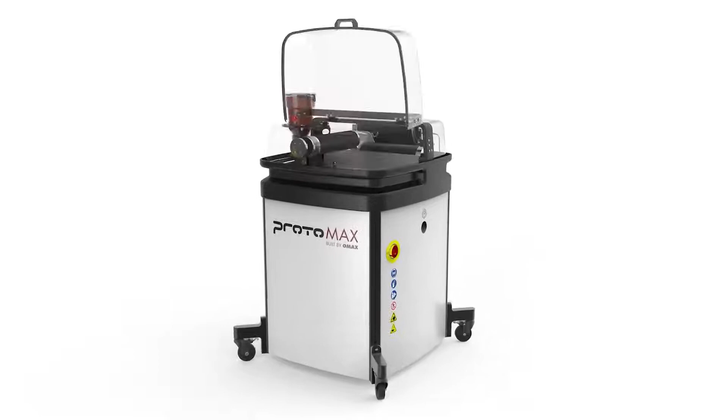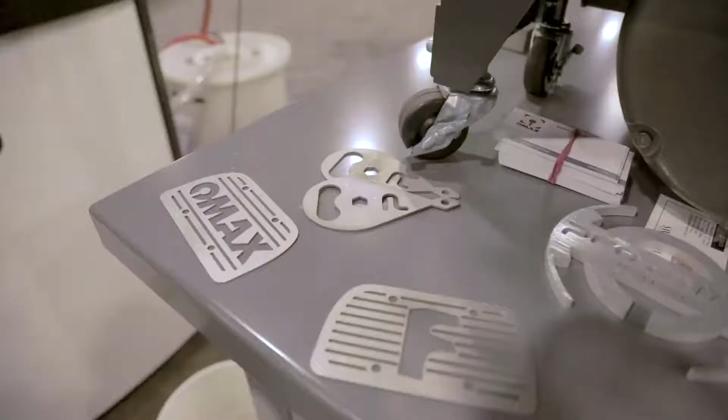Meet the ProtoMAX by OMAX. The ProtoMAX is the first light industrial water jet on the market. It cuts metal, glass, plastic, and wood. The ProtoMAX cuts almost any material under 1 inch thick with a 12-inch by 12-inch cutting area.

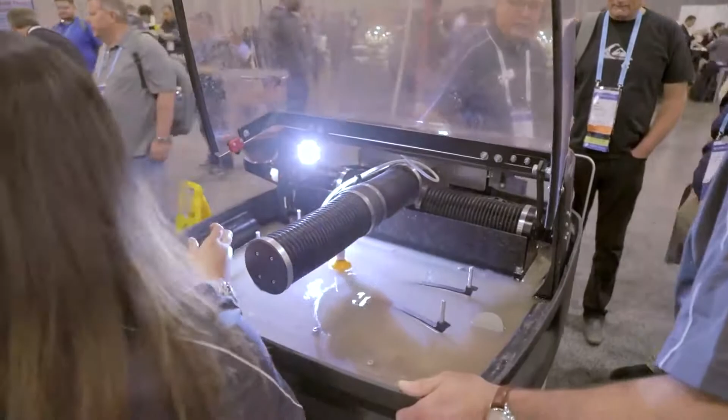He said, yeah, if you want to bring it in, go ahead. So we brought it in and we started cutting things, and I had no idea how many small parts I was going to end up cutting. We've gone through buckets and boxes of abrasives with this thing, just cutting out all this stuff.

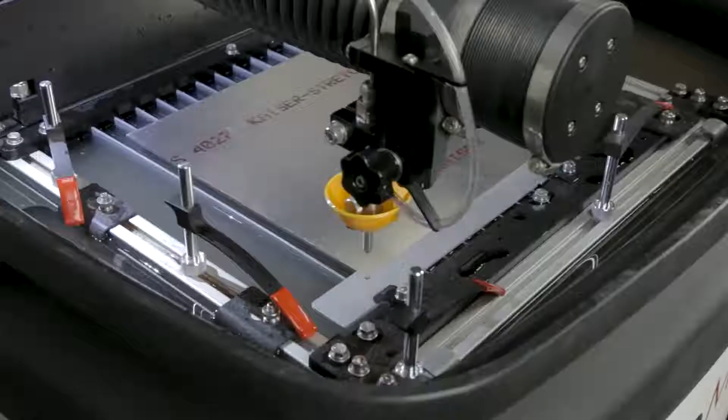Using the new ProtoMAX abrasive Waterjet as a teaching tool for the next generation of manufacturers, OMAX inspires design, machinery, and innovation as students and teachers explore the advancements of abrasive Waterjet technology.

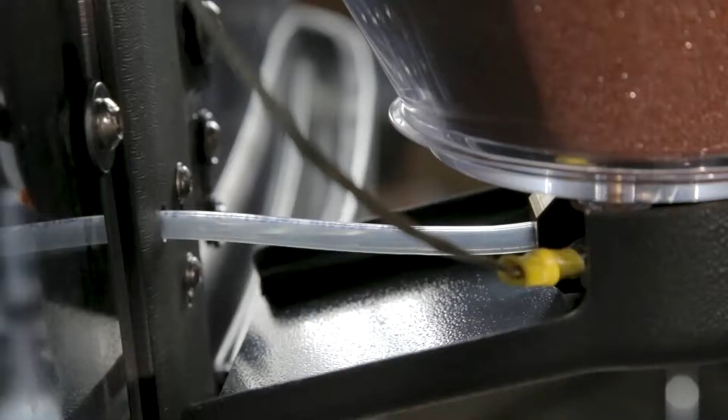The ProtoMAX IntelliMAX software is developed alongside the abrasive Waterjet hardware. Using empirical data on how the jet stream behaves with the specific configuration of nozzle, abrasive, material cut, and more, the developers are able to better adjust for what is actually happening at every single point along the cutting toolpath.

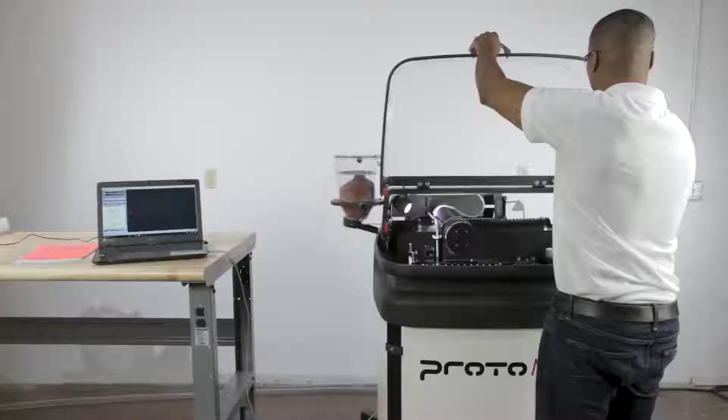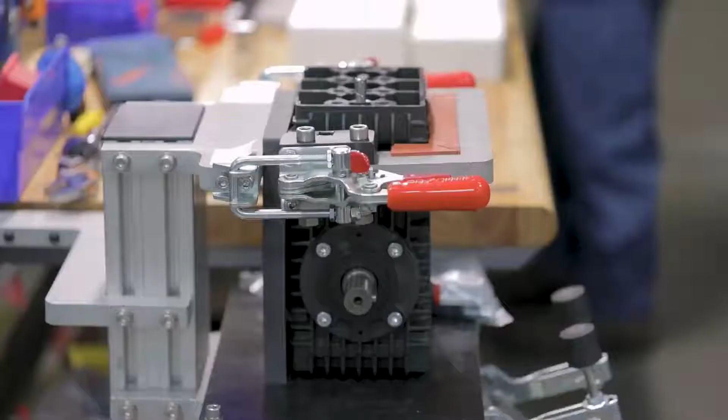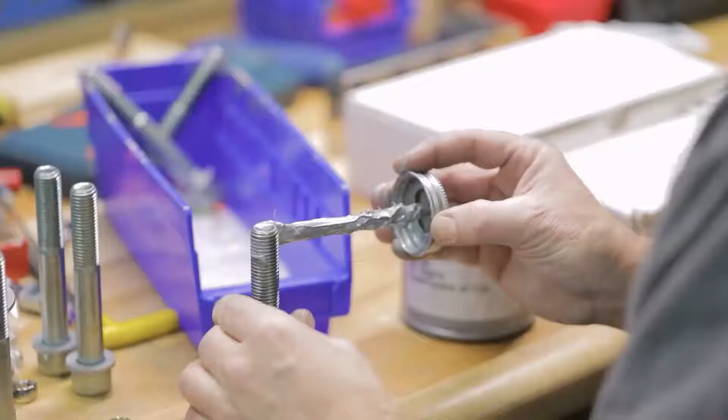With advanced OMAX engineering in a space-friendly package, the ProtoMAX delivers 30,000 PSI cutting power with a 5-horsepower pump. The power to cut through 1-inch steel comes from this pump. OMAX has decades of experience in ultra-high pressure, and we use this knowledge to take the existing advanced direct drive technology, simplify and consolidate and reduce the size of the pump. The result is a system that is powerful and cuts fast.

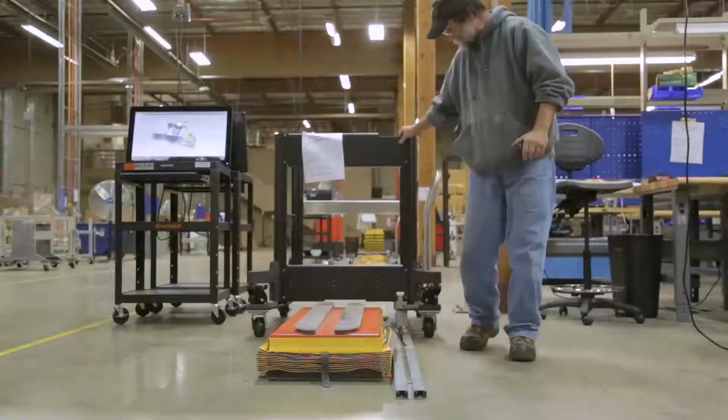ProtoMAX is an excellent user-friendly machine to build a curriculum around advanced manufacturing technology. Compact, safe, and easy to use, the ProtoMAX is a perfect teaching tool. Several universities have elected to add ProtoMAX to their engineering, material sciences, robotics, and arts programs, allowing students to experience hands-on innovative technology.

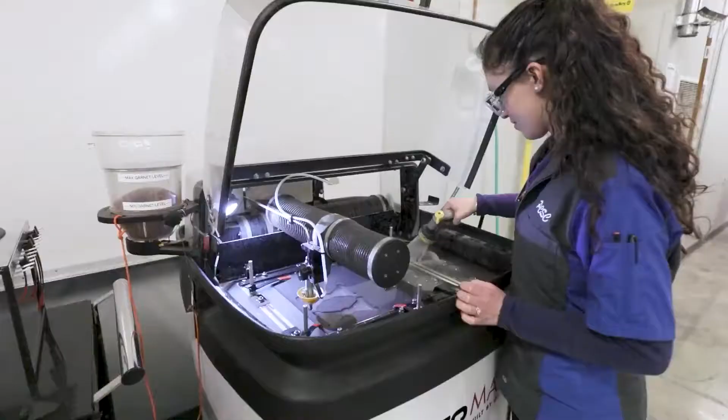I decided to introduce Waterjet cutting technology as a teaching platform because it was basically the last missing piece as far as my curriculum, where I already have CNC mills, routers, a CO2 laser, CNC plasma, and the Waterjet was kind of the missing link that allows us to process materials in a different way and also have a much higher level of accuracy and detail that we can't get with our other machines.

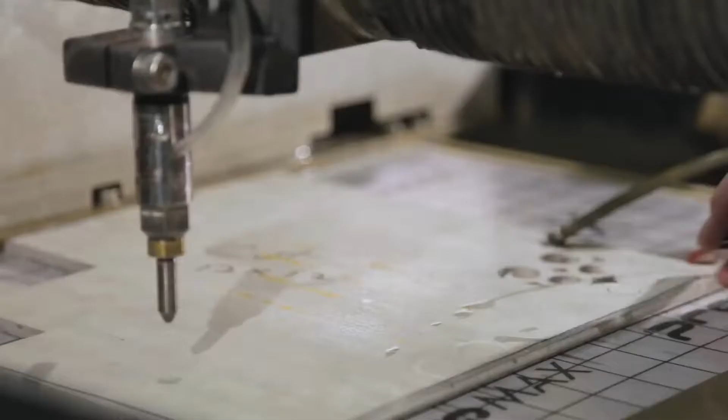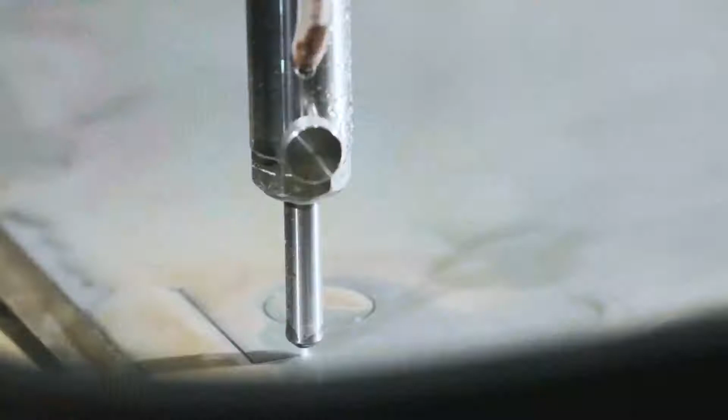Now that you've learned a little about the ProtoMAX, let's dive into how the machine actually works. Welcome to the ProtoMAX Virtual Trade Show.

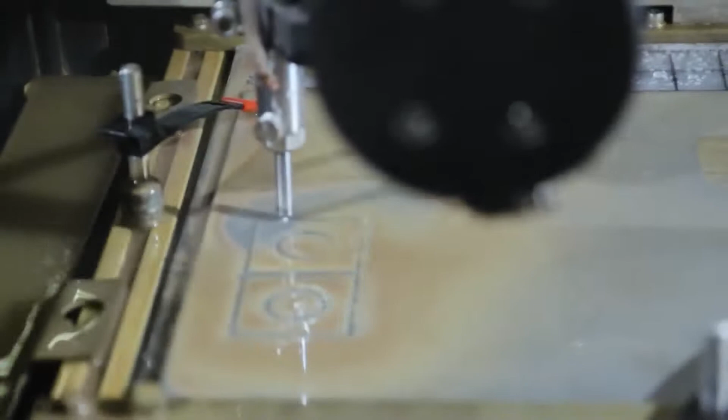Hello, everybody. This is Dave Fuller, the product manager for ProtoMAX. Thank you for joining us, and thank you also for your indulgence in viewing this COVID-induced goatee. I know it's not very pretty.

So let's talk about ProtoMAX. Obviously, my favorite subject. It is the most compact, powerful, affordable, industrial design, what we call entry-level abrasive water jet. Why is it entry level? Because it is an affordable bridge to abrasive water jet enlightenment. It is your segue into the wonderful world of abrasive water jet cutting.

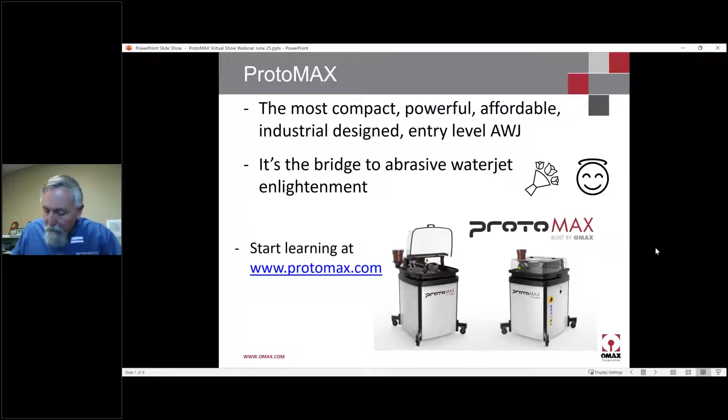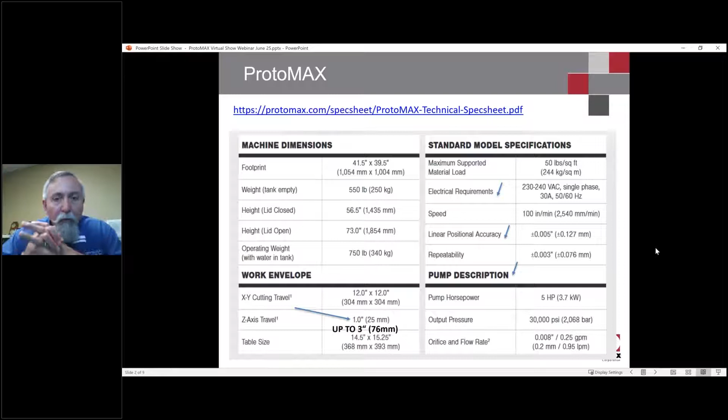Let's talk a little bit about the specifications of ProtoMAX. This is a technical specification sheet that's also derived from our website. When it comes to some of the pertinent items, the footprint is one of the ones that makes it most attractive because it can fit in spaces that you would never have dreamed a water jet could fit before. And we'll show you that outline.

It only requires 230 to 240 volt single phase dedicated 30 amp circuit power. Pretty much the same kind of circuitry that an electrician would apply if you're going to be putting in a dryer, as an example, except it's a 30 amp requirement.

It's a very accurate machine. Linear positional accuracy is plus or minus 5 thousandths. Repeatability point to point is plus or minus 3 thousandths. And you can often get much more accurate with the proper type of fixturing and stability on the machine.

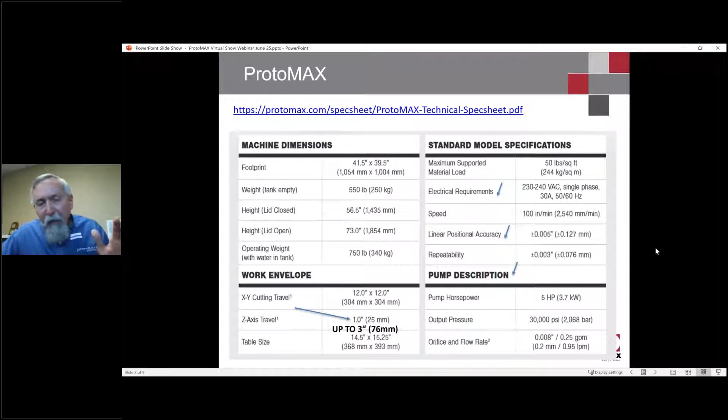The video mentioned that it's a 12-inch by 12-inch cutting area. You can put a bigger piece of material on there, about 14.5 by 15.25-inch size material can go on, but the effective cutting area is 12 by 12.

It does indicate that you can cut up to 1 inch thick material, but the cutting models have been set up so you can cut up to 3 inches. There's nothing out there in the marketplace that'll cut up to 3 inches in such a compact platform. You do that by setting up special fixturing and drop slats, and if you have a need for that, we can discuss it.

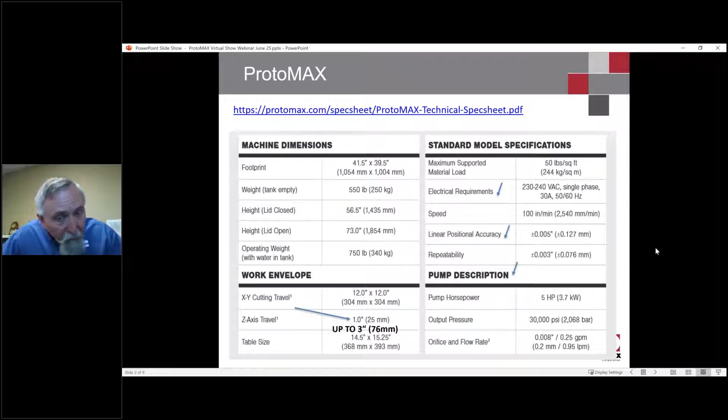The video mentioned that the pump horsepower is 5, output pressure 30,000 PSI, and we use a 30 thousandths mixing tube and an 8 thousandths orifice, but you can also purchase and utilize 21 thousandths mixing tubes.

What can it cut? This is also off of our website - virtually anything, and that's what the video had described. So if you know anything about abrasive water jets at all, even if you don't, think about what you want to cut, and there's a strong chance that it can be cut with an abrasive water jet. If you're cutting tempered glass, I wouldn't recommend it, but virtually anything else - it's a very short list of what it can't cut. That's the power and beauty of abrasive water jet cutting: the versatility.

You can see different examples of what's been cut, and you can go on the website and dive into this deeper and find out exactly how long it took to cut each one of these components and how much abrasive was used. We have a utilities guide again on the website.

Let's bring out and talk about some of the pertinent requirements. ProtoMAX comes with its own computer. It's not a powerful, robust computer - it's specifically designed to run our CAD/CAM system, which we call IntelliMAX. The CAD portion is called Layout, and the CAM portion is called Make. You have a USB cable that fits directly into the computer, which means you're going to also need to power the computer with a 115 volt outlet.

In terms of water supply, city water is what we would recommend without any further filtration required. If you're going to run well water, or you have rusted pipes, old pipes, what have you, then you're probably going to want to take a look at a pre-filtration system. Again, if you have any concerns, we can do a water quality test, and we can talk about those options.

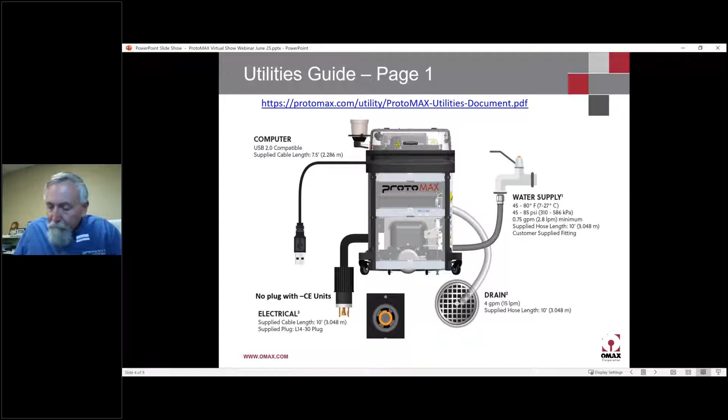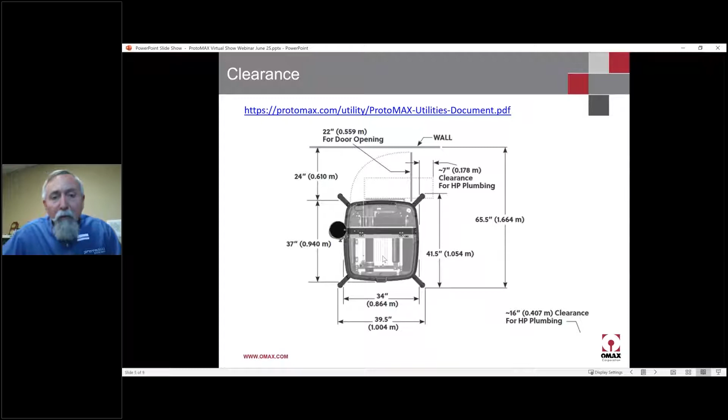Particularly for educational institutions, it's extremely important that you have enough access to our software to be able to run it and update with new versions. There is no cost for our software, and you can download unlimited copies. You could actually go into, and I'm going to show you that right now, our website. Here's the main website, you can go up to menu.

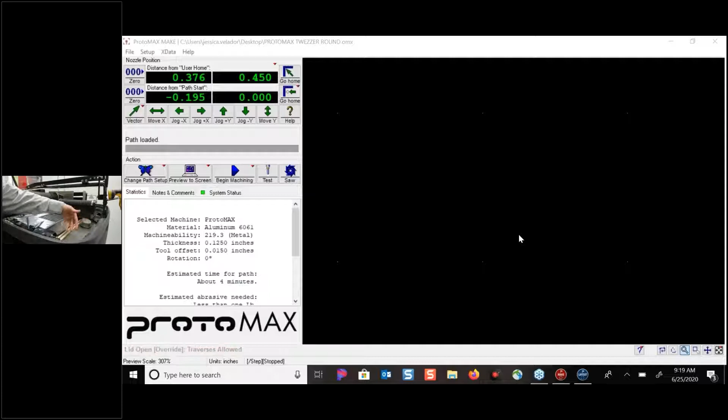Over here, you're going to see our drain. This is just a manual drain. Raise it up and down. Down, obviously draining your water out. Up is keeping it at a level that you want during cutting.

One of the important things that you want to remember about the drain is that we try not to overfill the water. We don't want the water overfilling because we risk damaging some components and whatnot. So best practice is, let me remove this, to not fill your water above this bracket right here. That's a good reference point. You're always going to want to keep your water below this bracket.

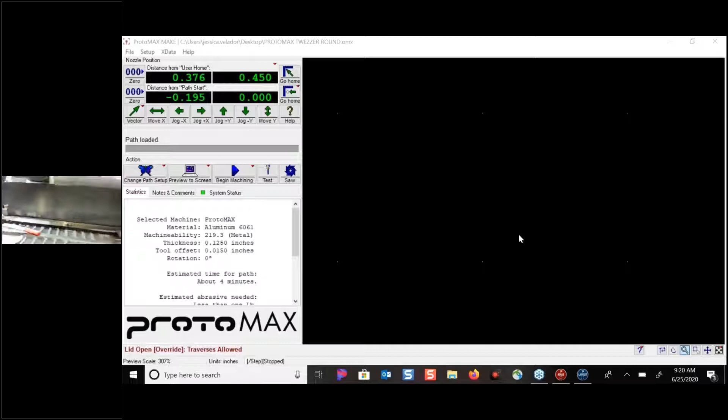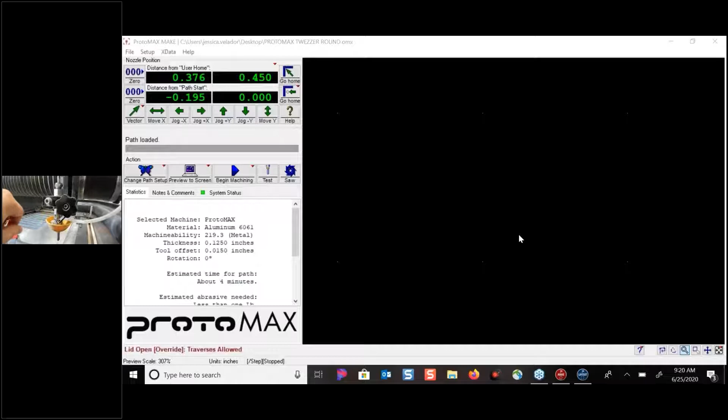So next thing I want to show you, if we come around here, we've got your mixing tube and your nozzle body. Inside your nozzle body is your orifice. That's an 8 thousandths orifice. Your mixing tube is 30 thousandths. And then inside here, right in about this area, is your last chance filter. So that's good to know. Here you have your high pressure lines that are going to run all the way back, out, down into the pump.

And then here we come across to our hopper. Our hopper is what's holding our abrasive. For those of you that don't know what abrasive is, this is actually what is eroding your material as it cuts. So think of it as the water is the driver, and this is what's actually cutting it. It's just like the stuff that you find on sandpaper. It's a mineral in the ground. We're using 80 HPX.

Down here you have your hose for your abrasive feed line. It's going to come all the way out. It's going to wrap around. You've got your light. It's going to wrap behind that, come all the way out, and then down where you're going to plug it into your hole for your abrasive feed.

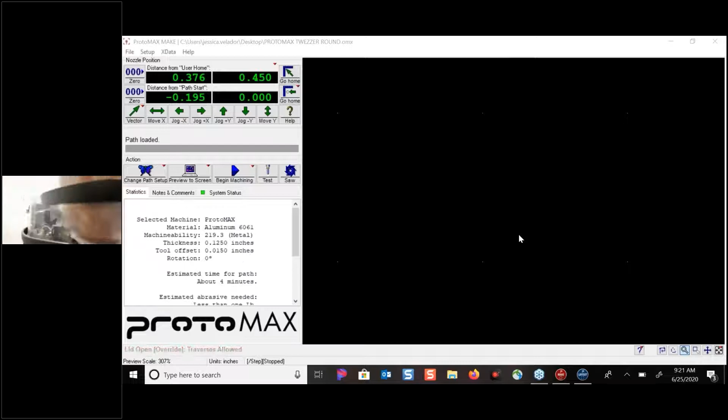And then if we come around to the side a little bit, I'm going to show you our motors. Right here is our X-axis motor, and then the other black box that you can hardly see, that's your Y-axis motor. If you look at it from the rear, you're going to see a little green light displayed on it as well. It's definitely good to know where those are located for any reference that you may need later on.

I'm going to give you an overall view of it. You've got your lid. You've got your lid sensors, as Dave mentioned earlier. Can't cut unless the lid's closed. These are your sensors that are preventing you from doing that.

I've got the covers off the ProtoMAX so I can show you what it looks like. If you go down here, here's where your tank ends, and then your pump down below, 5 horsepower pump, 30 thousand PSI of pressure. You've got your wet end on the right-hand side and your high pressure lines coming in.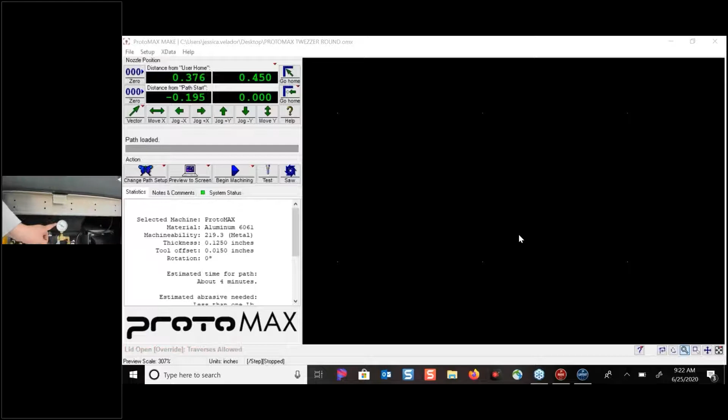And then if we come to the side, this is where your incoming water will be. This is your incoming water. As an accessory, you can have a hose. I definitely recommend a hose. You're going to need it to rinse off material. Here's your filter, your pre-filter. And then you're always going to want to know what your incoming water pressure is. Right now we're about 43-ish, maybe 45-ish, 48.

And then coming out here is your drain hose. We've got it in our abrasive filter tank. That's what that looks like. A lot of people just have it going out to a drain of their liking. And then your power switch. I guess that's a key one to note. So that's an overview of our ProtoMAX.

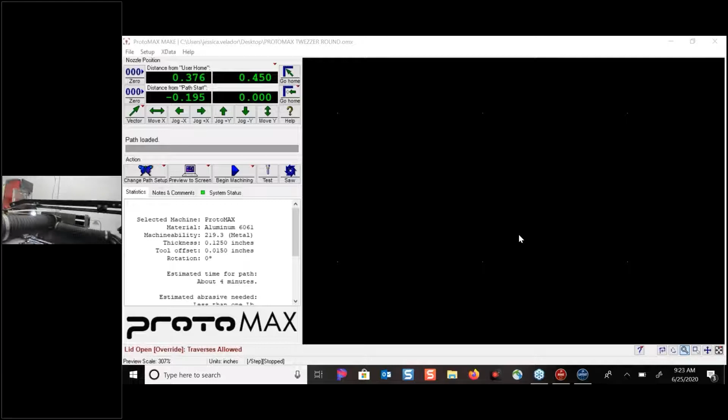I'm going to hook this back up to the camera. Just give me a second. Now I'm going to switch over to the webcam, and I'm going to show you my screen and just give you a little rundown of the software itself. So here we have the software.

Now you can import most other CAD files. So we can import ORDs, DXFs, PDFs, DWGs, SVGs, AIs. We get asked a lot if you can use other CAD programs. Absolutely. The ones that I just listed are not all of them, but those are the main ones that a lot of people use. And you would just simply go up to File, Import from another CAD program. It'll ask you a few prompts, you answer them, and then you're on your way and it'll come up.

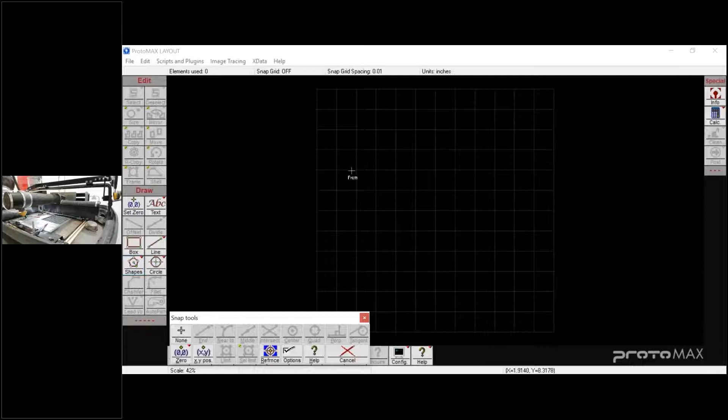So in this case, I'm just going to draw a quick little box just to show you, because you always have to finalize your drawing within our software so that you can get an ORD file that is compatible to communicate with the ProtoMAX. So say I just imported this drawing with a 3x3. Here we go.

So this is what your drawing is going to look like if you just imported it. It's going to be green for your traverse lines, green traverse lines. What a lot of people don't know is you have to assign a quality to it. So you can go in here to quality, and quality 1 means that it's going to cut the fastest, but your edge quality may not be the best, but it's definitely livable. 5 means it's going to cut the slowest, but your quality is going to be a lot nicer finish.

In most cases, people get away with quality 3. That's just fine for them. So in this case, you can come up to quality 3, select quality 3 and select all the lines that you want. Now, a quicker and easier way, if you've got tons of lines, all you've got to do is go to quality, right click it, select all, and then choose the quality that you want, and it'll automatically do it. So it saves you a lot of time and hassle to do it that way.

The last and most important part of it is you've got to path it. So that is what creates your traverse lines and your lead in and lead outs. Your traverse line is where it's going to move to the location that you want it to begin cutting, but it hasn't activated the pump. Your lead in and lead outs are where the pump is starting to turn on. You never want to start cutting dead on to the center of where you want to start cutting an actual physical part. So that's where our lead in and lead outs come in.

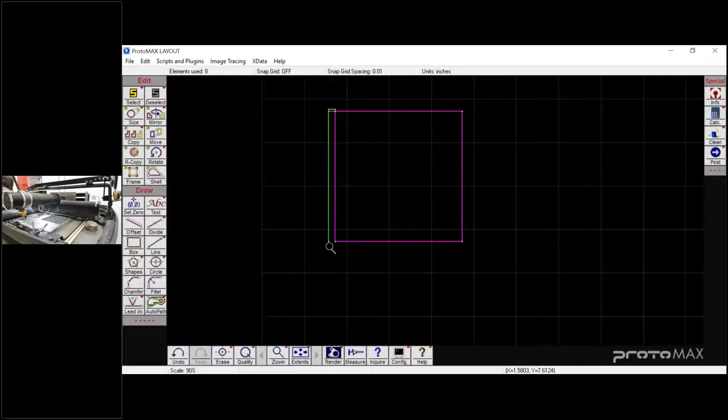We do have a tool that is an auto path. You can click this, it'll generate your lead in and lead out. As a default, it always starts at the bottom left and ends at the top left. And so what this is doing is it's saying, okay, I'm going to traverse up here. I'm going to lead in right here, and then I'm going to go down, come around, cut my square, lead out, and then traverse to a safe location that I know I can pull my part on.

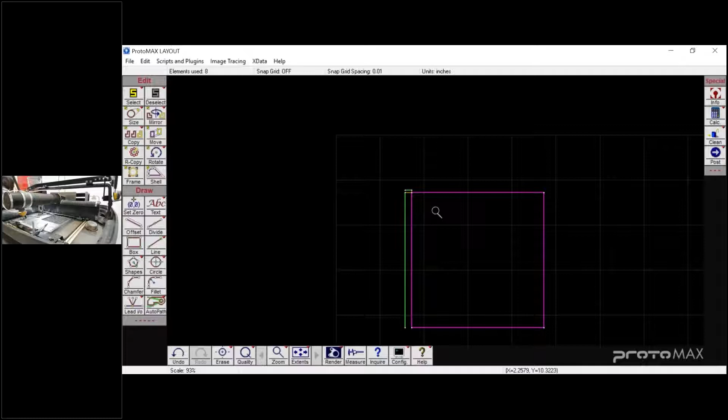So all you have to do is select where you want it to begin. Keep in mind, if you choose the top left as your starting point for your traverse, it's going to cut on the inside of your box, and that isn't right. We want the box itself, so we need to make sure that we choose the bottom left, because that's how it was designed to cut the outside of the perimeter.

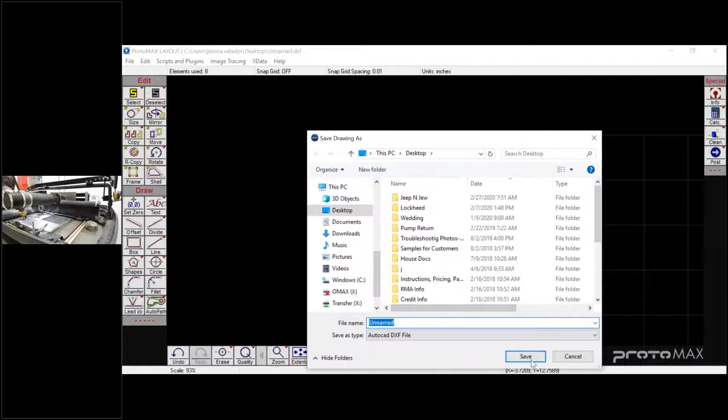So if we just go, sorry, I've got to move this little window. If you just go up to post, oh, sorry, I always forget this stuff. You've got to save it. In most cases, a lot of people save their drawings because they don't want to lose it. In this case, it was just a sample. So I'm going to hit save as. I'm just going to file it as unnamed on my desktop. I already have one. Yes, I want to replace it.

Then you can go up to post. Move this guy out of your way. Select the starting point, and here we are. This is what's going to generate our ORD file. This is our last stop to preview your drawing, make sure it's all right, make sure you're cutting on the outside, not the inside, wherever it may be.

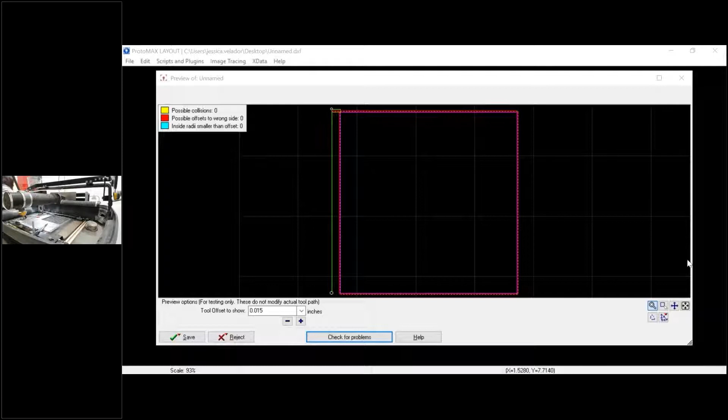If it was a more complex part, you're going to hit check for problems, see if your radiuses are okay, if there's any possible collisions. If there's a bunch of little parts and you cut right here, and then it zooms down to right here, and then it goes back here, and then it tries to reverse, these loose parts that you cut may be floating around, so it's going to say, hey, there may be a possible collision. You definitely don't want that with your mixing tube because you risk damaging it, and also risk ruining your material. So if this is perfect, and this is the way you want it, you can go in to save.

Wherever you save this main DXF file is where the ORD file is going to be saved as well. So it's going to go into my desktop because that's where I saved it.

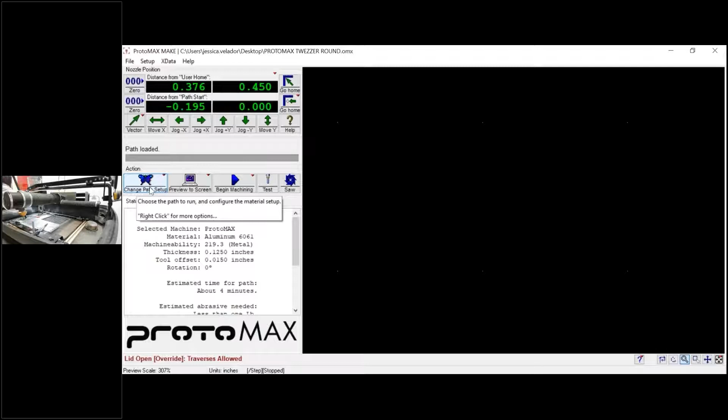Now we can go over to Make. This is our driver, this is what is running the ProtoMAX itself. So this little butterfly right here, change path setup, is where you're going to click to finalize and choose the file that you want. In this case, we're going to cut some tweezers out today, but if we wanted to cut that box, it's right here. But we want to do some tweezers.

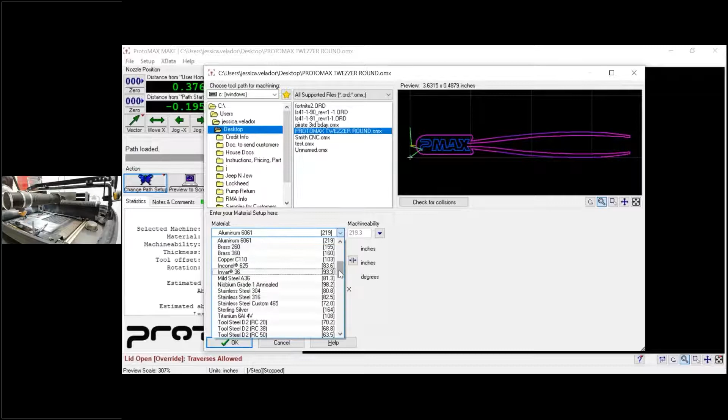In here, this is the important part before cutting. You're going to want to select the material. We've got a drop-down box of a lot of materials. You can add materials as well. You just need to know the machinability for that specific material that you want to cut.

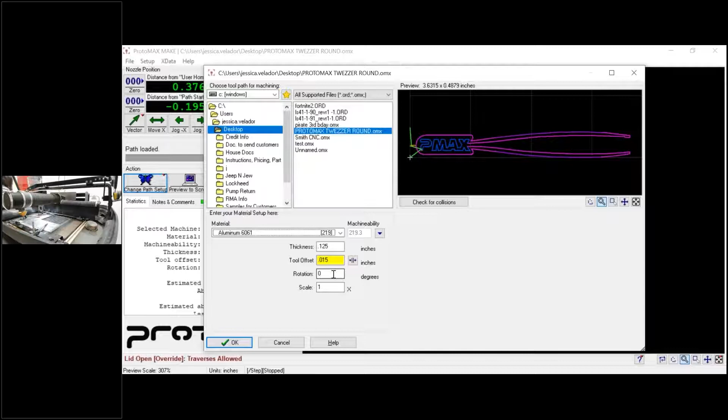In this case, our material thickness is 0.125. Our tool offset is 15 thousandths because our mixing tube is 30 thousandths, so tool offset is half of that. Now, if I had a little section of the material left, I could rotate it in here. I could scale it to make it smaller or larger. So those are nice little features. If you forgot about it in layout, you can do a last minute change on those.

We're good to go here, so I'm just going to hit OK. In here, there is a radius that is too small. I already knew about it, not a big deal. I'm going to say it's okay. I can live with that because it's not a critical part. But this is just the last warning, saying hey, are you sure you want to cut this because it doesn't fully meet your requirements per your drawing? So, yep, I want to do that.

I'm going to load my part up.

Now here we go. Nice thing about our software, you can come down to the left and verify. All right, I've selected material. I've got my machinability, my thickness, my tool offset, and I've got no alterations for my rotation. It's telling me that it's going to take about 4 minutes to cut, and it's going to consume less than 1 pound of abrasive. And we've got 2 pierces.

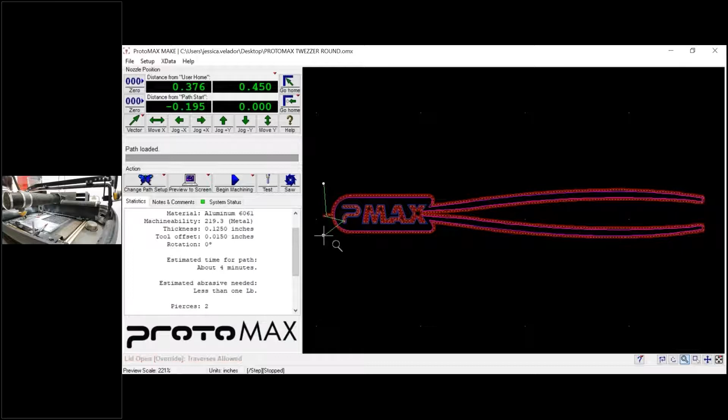The piercing points are your turning on and off the pumps. So as you can tell, it's going to come traverse, it's going to cut out my P. So it's going to traverse, turn on my pump, cut out the P, turn off the pump, go in, and then cut the entire tweezers, and then end out with a traverse over here. So those are your 2 piercings.

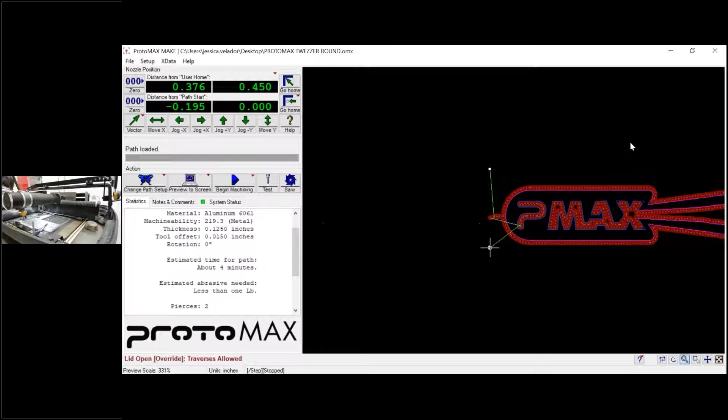So now I'm going to go back over to our webcam, and I'm going to set this up so that we can begin cutting.

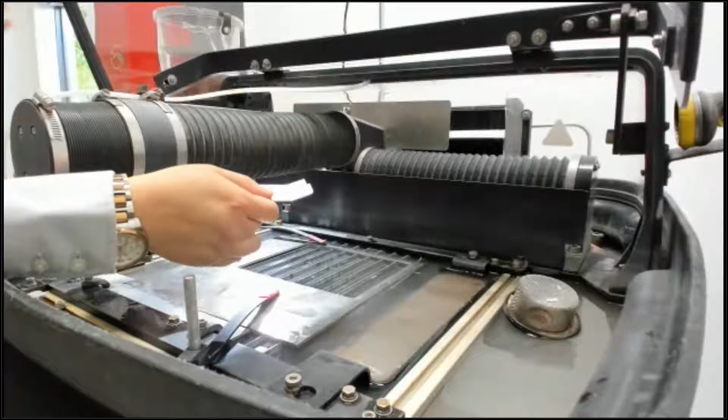So first thing you want to remember is that the ProtoMAX uses a 75 thousandths standoff tool. This is your gauge to set the height for your material and your mixing tube. You never want the mixing tube and the material to touch one another. It will cause clogging, and if you have a Waterjet, you're going to experience clogging at some point or another. You want to avoid it as much as possible because it is a hassle to clean it. You've got to throw away all your abrasive, clean out your lines, and so on and so forth.

Another recommendation we have, it's not required, but it is a nice tool to have on hand, is air, so that you can blow off your parts, clean any clogs, anything like that. Like I said, it's not a requirement, but it is definitely a recommendation to have. It is nice to have.

So here I am, just going to simply do them over here. There's a knob on the left-hand side. I'm just going to twist it, lower it, and put my standoff tool in there. And then I'm going to tighten it down. Then the last thing you want to do is shimmy your standoff gauge. If it doesn't move, that means it's too tight. So you want to come back and adjust it so that it's not tight, and it should move nice and freely just like that. So we're good to go there.

Last thing we have is our muff. Definitely keeps your tank clean, it reduces noise. Great tool to have, so you just turn it like a half of an orange, I guess. Here we're going to come, I'm going to reach around the camera here, and I'm going to fill up the water, just so that there's enough touching, or it's covering the material itself.

Again, the spray nozzle does not come with the ProtoMAX. It is an additional accessory. You can't live without it, in my opinion. You definitely want a spray nozzle. It's a lifesaver, and obviously you have to raise and lower your water constantly. It's definitely nice to have.

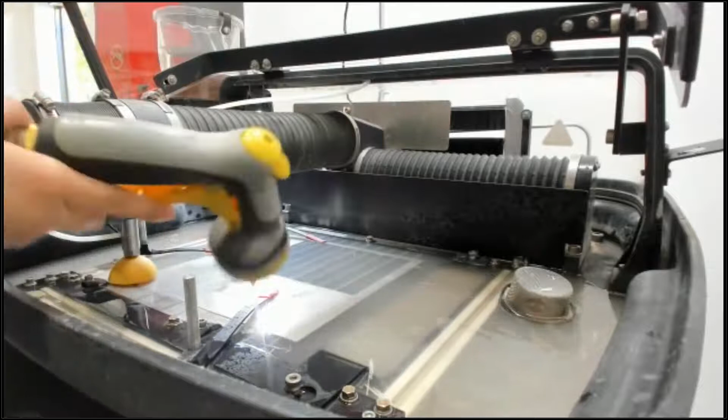Let's give this a minute. You just want to cover it just a little bit. As you're cutting, the water in the tank is going to fill, so you've got to keep in mind that you want to adjust your drain while you're cutting. If it's a long part, you don't want to overfill it, because then it's not going to drain enough. Then you'll worry about overflowing your machine and going above that bracket I mentioned, which we definitely want to avoid. So that's plenty of water.

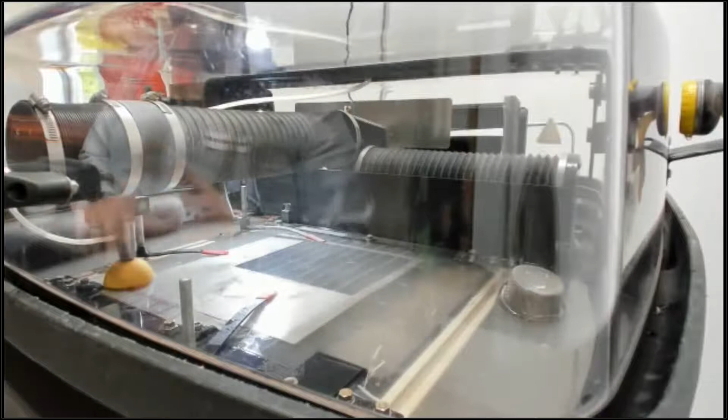Another thing I forgot to mention is I previously secured the material. You want to make sure your material isn't going to move at all. I use just two fingers, shimmy it back and forth. We've got our clamps, it's nice and great. Again, we've got to shut the lid, close down the lid, and I'm going to start the machine. I'm going to let you guys see - it's going to get cloudy in there, so cloudy you can't see it. At that point, we'll switch it back over to Dave so he can show you some sample parts. In the meantime, I'm going to start this up and let's see what we got.

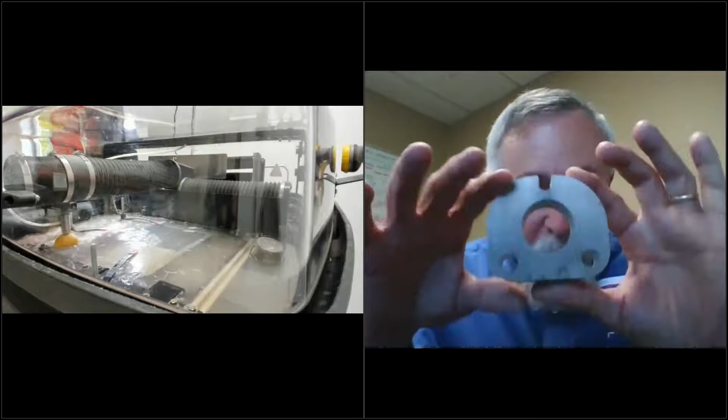While Jessica is showing you the cut, I'm also going to show you some of the recent pieces we managed to make on ProtoMAX. Let's start off with aluminum - a little gasket, or tail end of a flange. Here's what we call a dog bone. Again, 1-inch thick aluminum, took about a little less than 30 minutes to cut.

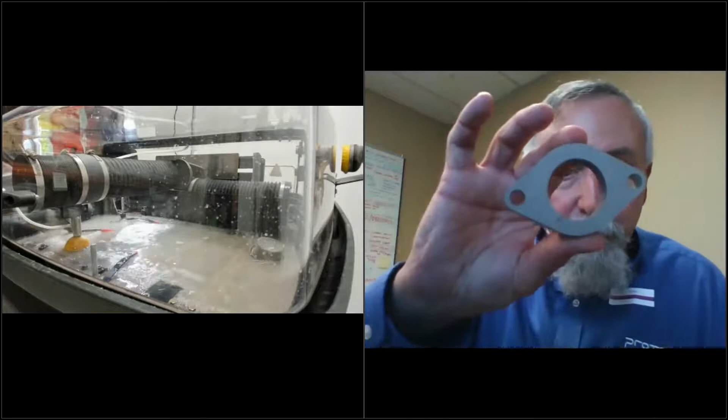Dog bones are also used - they're so named because they look like a dog bone, but they're really for tensile strength, material tensile strength, pull testing. We have a lot of customers in design, prototype, and R&D that buy ProtoMAX in order to cut dog bones. Here's wood - you can see there's no delamination. Stainless steel. Rubber gaskets. Carbon fiber.

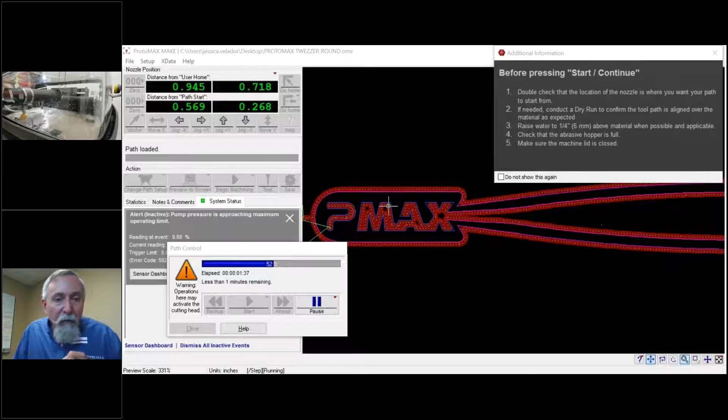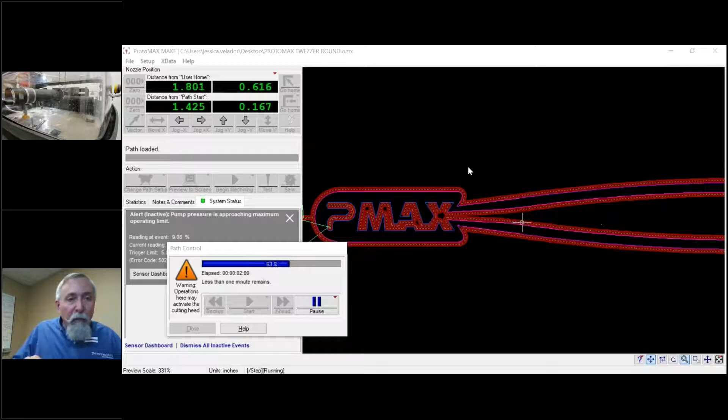ProtoMAX is a perfect piercing machine. You can see now also the path being taken to cut the pair of tweezers that Jessica is doing. When I say it's a pure piercing machine, there's a ramp up of about 4 seconds to introduce high pressure water gradually into the nozzle body. At the same time, it's drawing via Venturi effect and suction, gravity pull that's sucking the garnet from the hopper. Again, Venturi effect - that introduces the mixture of high pressure water and garnet into the nozzle body at the same time. Then that mixture, that slurry, exits the mixing tube when you start your cut, which means that mixture mitigates and prevents delamination of material.

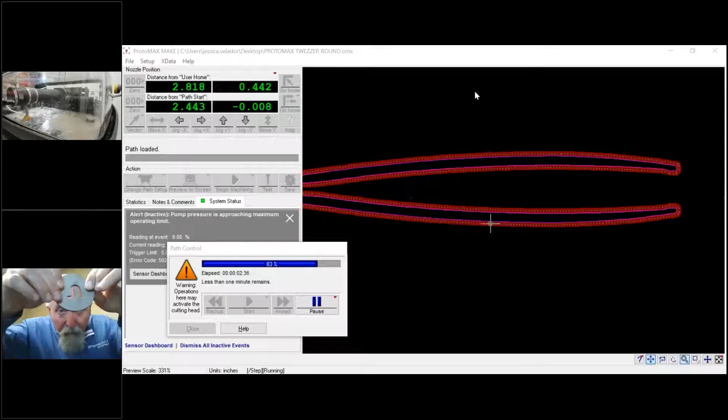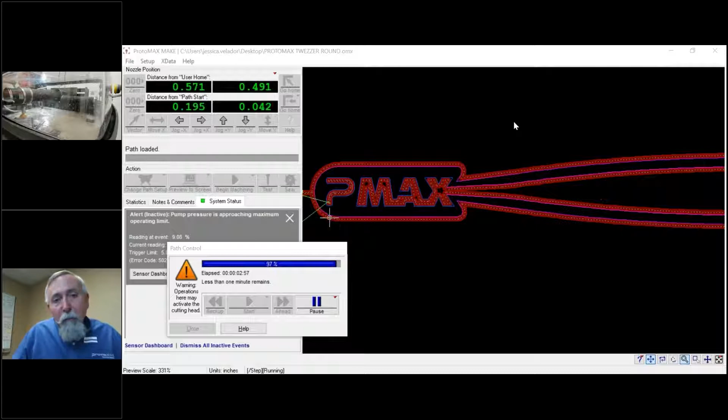So you can cut carbon fiber beautifully. Glass - you can tell it's glass because you can see me through it, and it's got a glass-like texture. As well, you can make different parts that show you the precision of the system. What I showed you before was one program, two separate parts. This is a 17-inch bridge girder. When I mentioned a 12-inch by 12-inch cutting area, the reason is that you could put a bigger piece of material in and index to cut a larger piece. That's the beauty and flexibility of ProtoMAX.

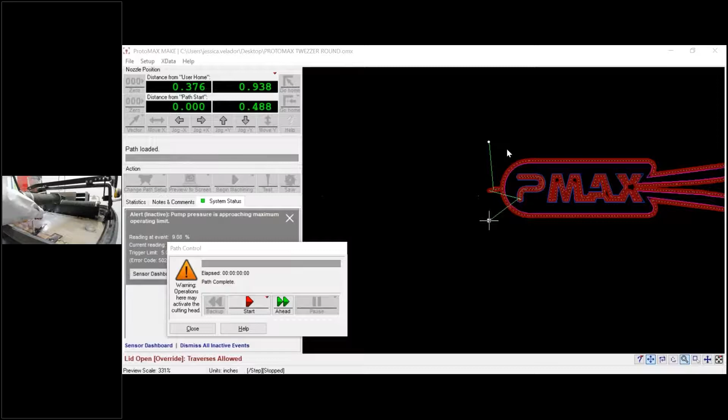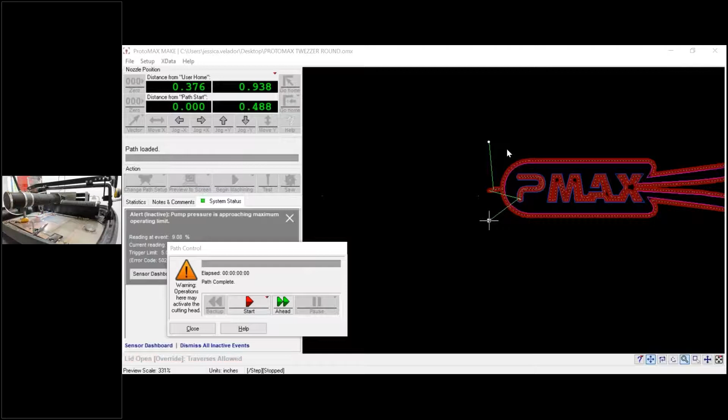I think Jessica is done, so I'm going to turn it back over to her to show you the tweezers. Okay, so as you can see, our cut is finished. I'm going to lower down the drain so we can see our material again. Pull out some tweezers - and that's what it looks like. Finished, nice edge quality. This is fresh out, no cleaning up necessary. Beautiful. And that's it - then you just hose it down, clean it up, and cut your next part.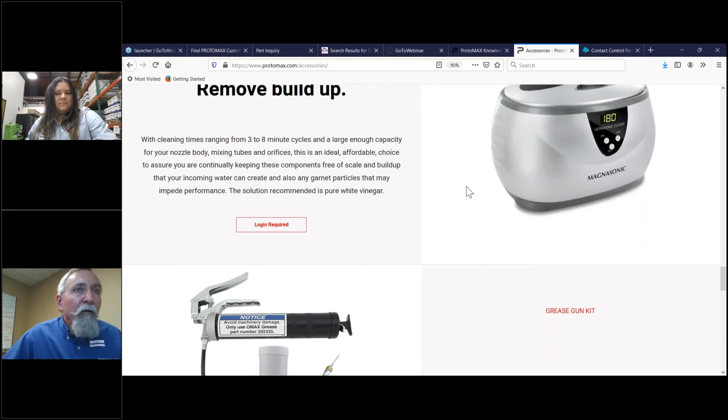Here's a spares kit or a consumables kit we would recommend that you get. It's going to put all the items that you need to rotate out on a regular basis on the shelf for easy access. You want to do an ultrasonic clean of your mixing tube, nozzle body, and orifice about every week or so for about 3 to 8 minutes. You want to grease the bellows, you want to grease inside the bellows on your X and Y.

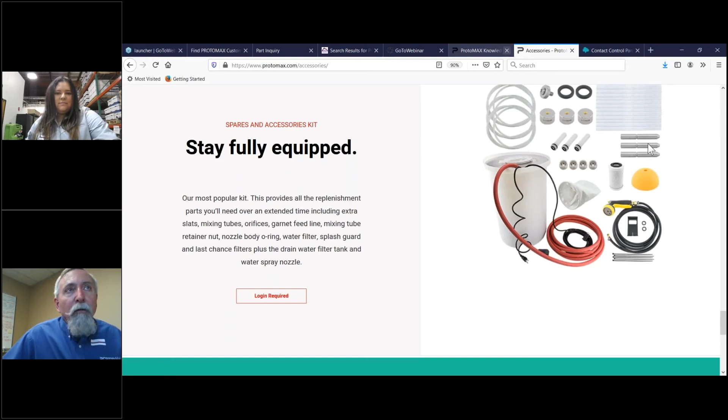At the recommended interval. And we have a master kit we talked about that a lot of people buy with the system that contains a drain water filter tank, spray nozzle, and all the consumables. So I'm going to turn it back to you, Josh.